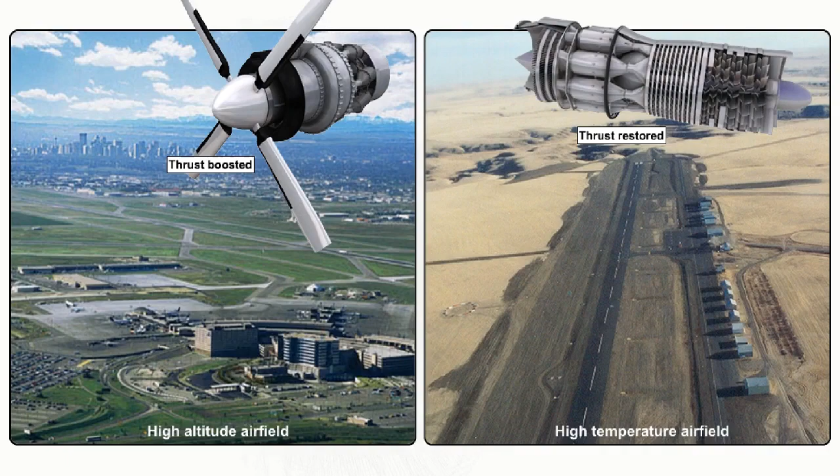In conditions of high altitude and/or high ambient temperature, the use of a water injection system can restore the thrust of a turbojet engine and boost the output of a turbopropeller engine. Typically, the water injection system is activated by moving the throttle to the takeoff position.

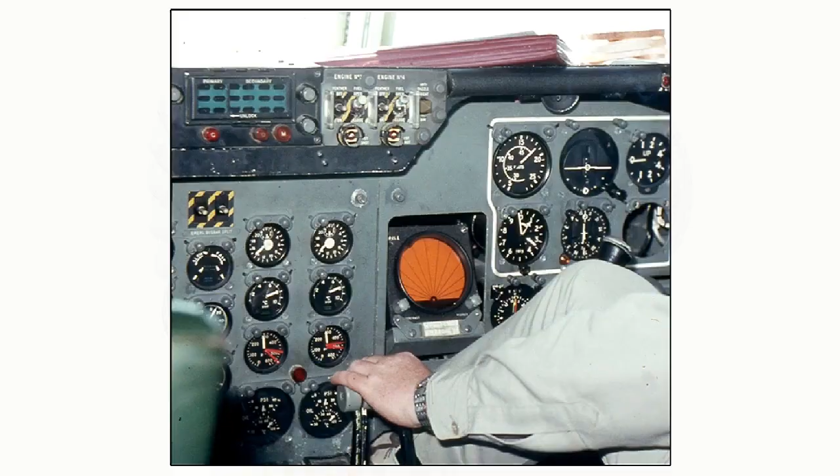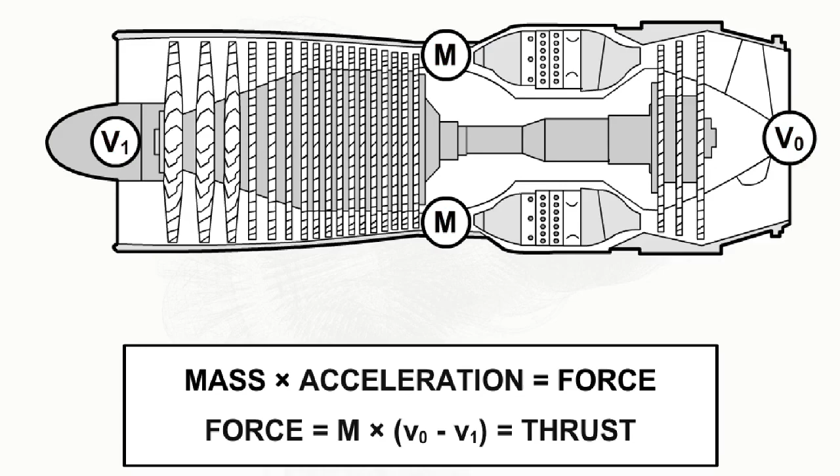We stated in the introductory lesson that the power output of a gas turbine engine depends upon the mass of air flowing through it and the acceleration imparted upon that mass of air. In conditions of high altitude and/or high ambient temperature, the density of the airflow through the engine, and therefore the mass of that airflow, decreases, causing a reduction of thrust in the case of a turbojet engine, or a reduction of shaft horsepower in the case of the turbopropeller engine.

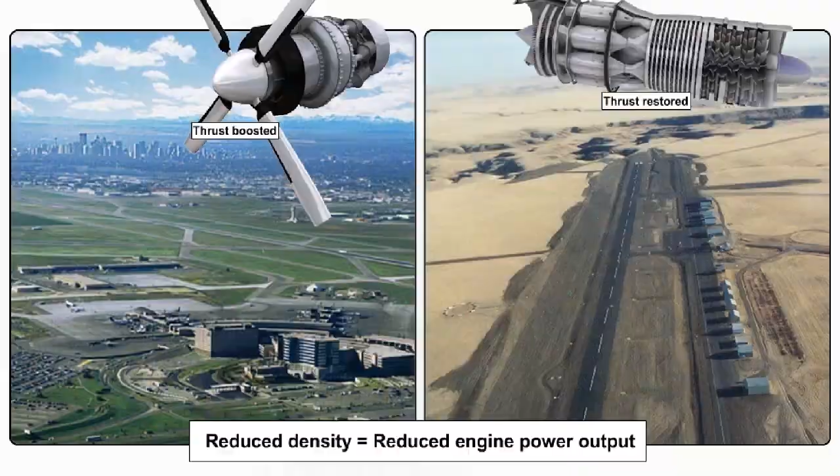To restore, or as is sometimes the case, boost the power output of an engine, the airflow passing through that engine can be cooled by spraying water into it.

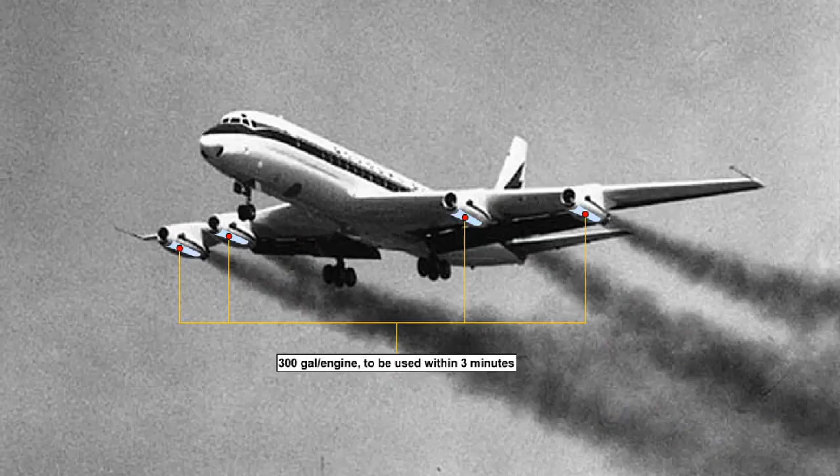The amount of water carried for use in these water injection systems can be large. The Boeing 707 and the DC-8 used to carry approximately 300 gallons of water injection fluid per engine, which had all to be used up during the 3-minute takeoff and climb. This equated to a water flow rate of 100 gallons per minute.

The fuel flow through each engine at takeoff was 9,000 pounds per hour, or approximately 22 gallons per minute. This gave a water flow to fuel flow ratio of 4.5 to 1 through the engine during those periods when the water injection was being used.

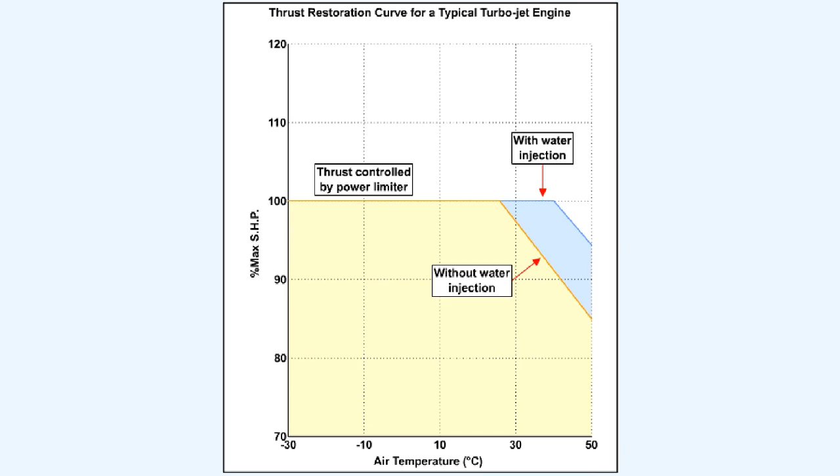The reason for limiting the thrust restoration of the turbojet engine to that of its flat-rated performance is that, although the mass of the airflow could be increased, with relatively few complications, by increasing the compressor speed, the maximum compressor outlet pressure has to be limited to prevent the engine compressor casing splitting under the excessive pressures that would be generated by using such a procedure.

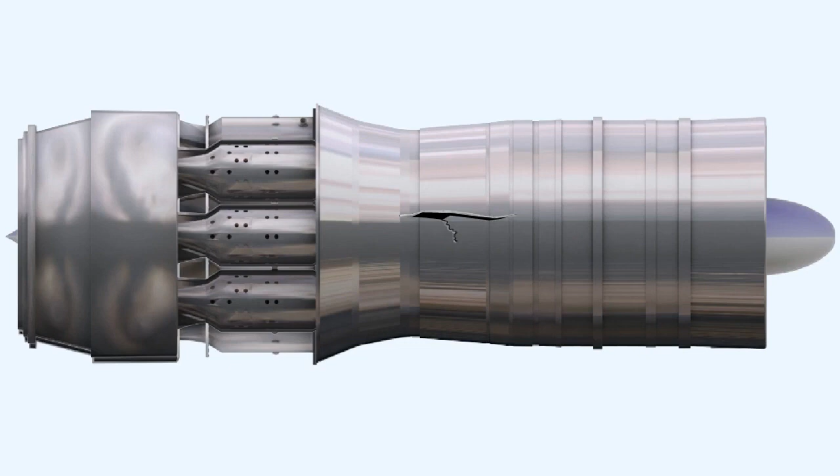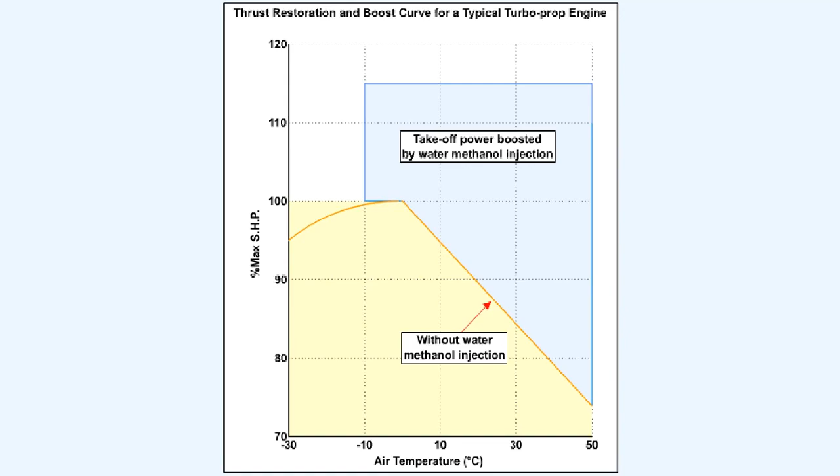In the case of a turbopropeller engine, if the water is injected into the combustion chamber, which is by far the most popular method of water injection, the mass flow through the turbine is increased relative to that flowing through the compressor.

In the turbopropeller engine, this increase in the mass flow through the turbine is not used to increase the compressor RPM, and thereby increase compressor output pressure. Instead, the increase in mass flow through the turbine is absorbed by coarsening the pitch of the propeller to increase the mass of air being thrust rearwards, while maintaining the engine rotational speed at no more than the normal maximum. This procedure very effectively increases the shaft horsepower output of the engine.

Some centrifugal compressor engines, and also some small American-designed axial flow compressor engines, used a system of injecting the water into the engine intake. Unfortunately, the water distribution was not of the best, and also the quantity of water injected had to be limited, so as not to cause an engine flameout.

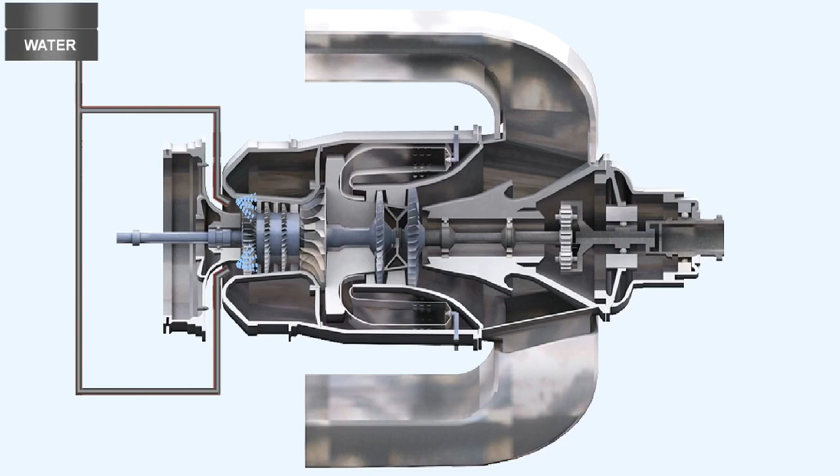As we stated earlier, injection of water into the combustion chamber increases the mass flow through the turbine relative to that through the compressor. Because a comparatively lower level of energy is being extracted from the turbine, even though there is an increased mass flow through it, there is a related decrease in the amount of pressure and temperature dropped across the turbine.

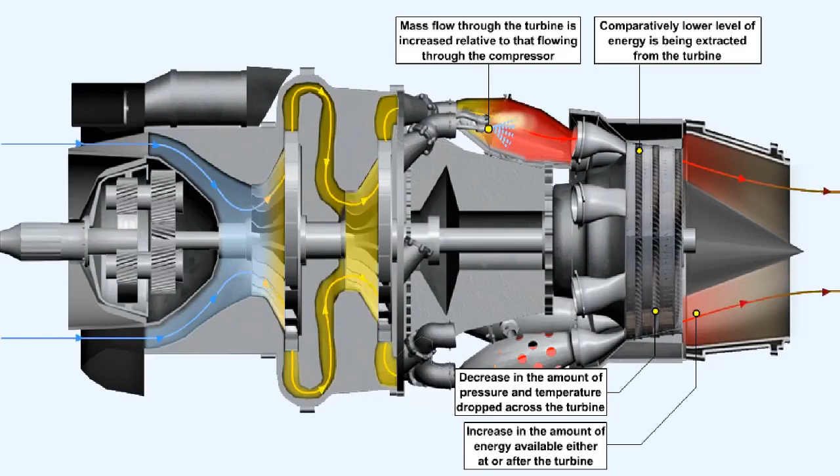This means that there is an increase in the amount of energy available either at or after the turbine. This can be used to generate extra thrust, either by driving the propeller at a coarser pitch, in the case of a turbopropeller engine, or, in the case of a turbojet engine, by increasing the pressure at the propelling nozzle.

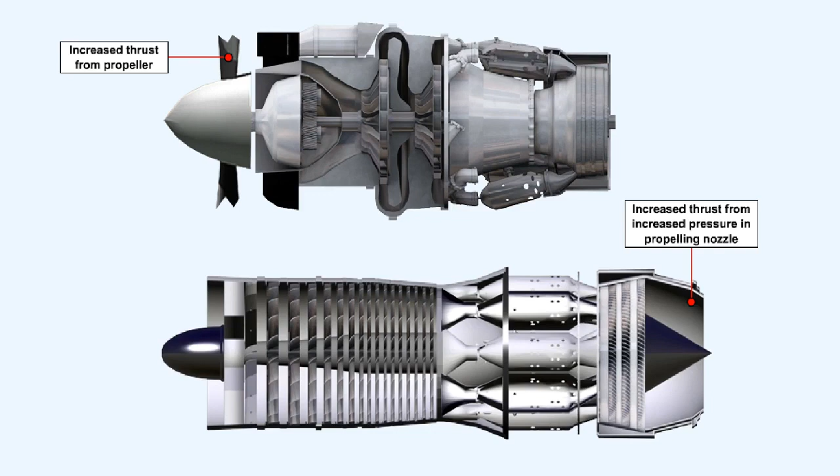A pure water injection system does have some drawbacks, not least because the water must all be used up on takeoff if it is not to freeze in the tanks as the aircraft climbs to altitude. It's logical to require an injection fluid that does not freeze. Thus, methanol is added to the water. The methanol serves primarily as an antifreeze.

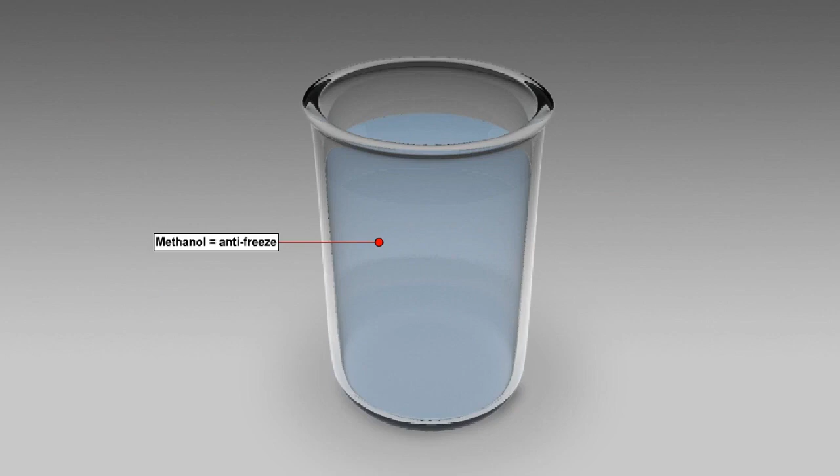By injecting coolant into the combustion chamber, the turbine gas temperature is lowered dramatically. However, if nothing was done to counter this fact, it would lower the amount of power potentially available, because the turbojet is a heat engine, which relies on there being a large temperature drop across its turbine. The bonus obtained by using methanol is that, because it is an alcohol fuel, it burns, and thus adds to the temperature of the gases, raising the turbine gas temperature back to its original level.

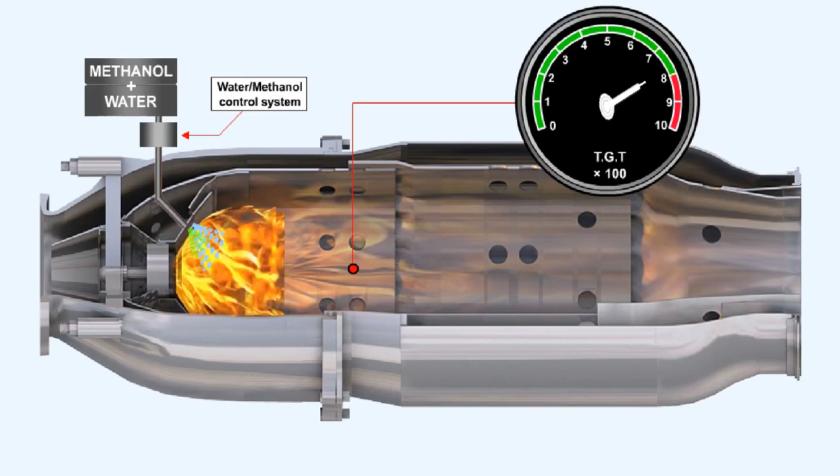In order to regulate the amount of heat added, the quantity of water methanol injected into the engine must be carefully regulated. This is accomplished by a water methanol control system. The proportion of methanol added to the water must also be carefully controlled. A ratio of 40% methanol to 60% water by volume ensures that the turbine gas temperature limits should never be exceeded during use of the water methanol system.

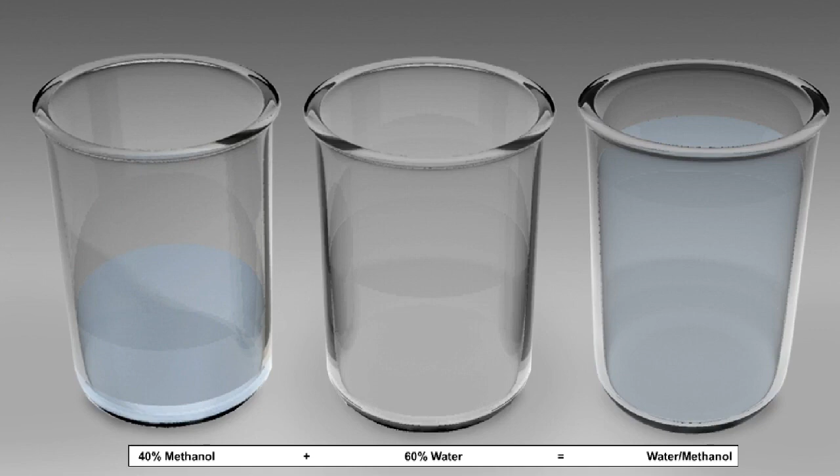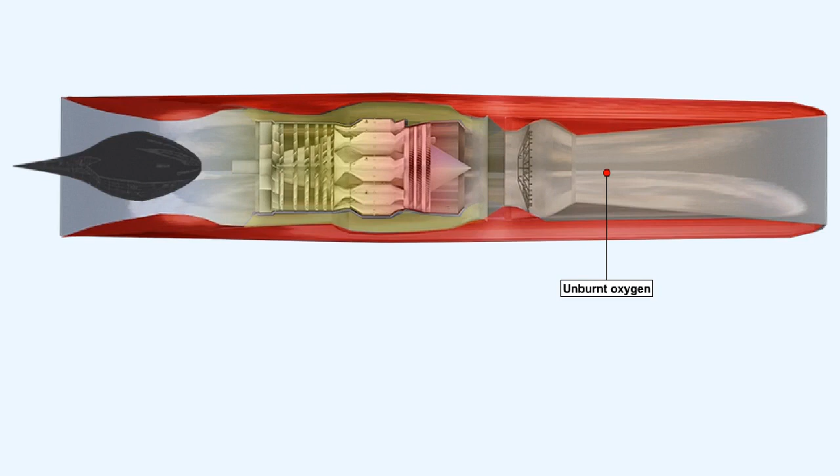Thrust augmentation by afterburning, or as it's sometimes called reheat, makes use of the unburnt oxygen which remains in the engine exhaust gases to release more heat energy. This is achieved by injecting fuel somewhere between the turbine and the propelling nozzle and burning it. Afterburning is used to improve takeoff, climb and combat performance. Its use is mainly restricted to military aircraft.

Fuel is introduced into the jet pipe through discharge nozzles centrally disposed around the axis of flow. This enables some of the relatively cooler turbine discharge gas to flow along the jet pipe walls, which aids in cooling the jet pipe. This is required because the afterburner flame temperature may be in excess of 1700 degrees Celsius.

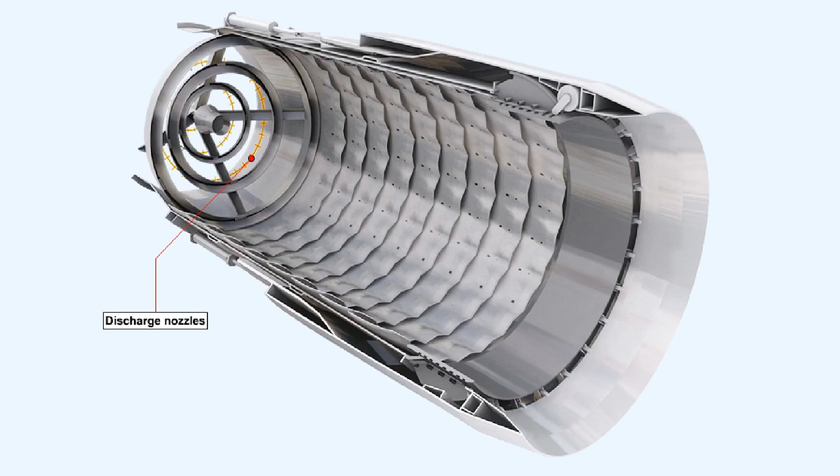An afterburning jet pipe is fitted with a variable area propelling nozzle. The area of the propelling nozzle is restricted during non-afterburning operation, and it's opened fully to allow for the increased volume of gas which is produced during afterburning operation.

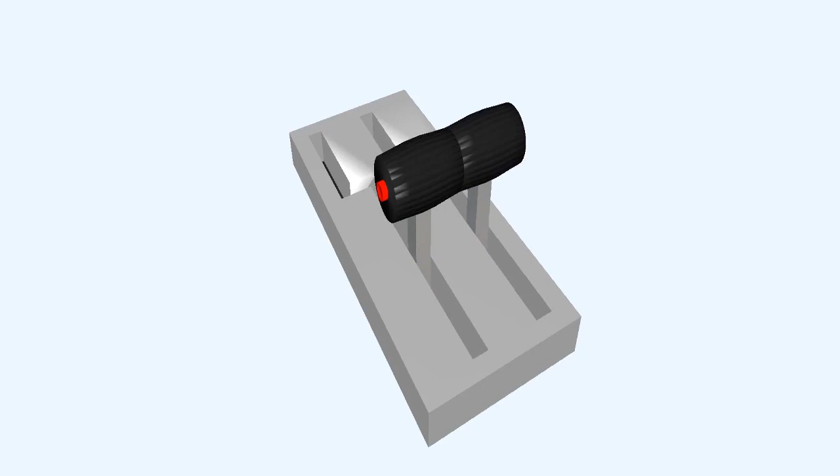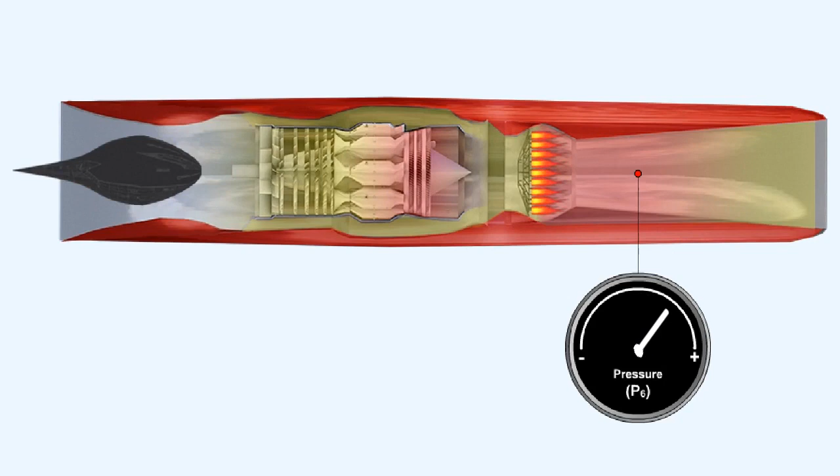The selection of afterburner is usually initiated by the pilot moving the throttle lever through a detent or gate. Control of the nozzle is automatic. When the fuel from the afterburner is ignited, the pressure in the jet pipe, which is called P6 pressure, will increase.

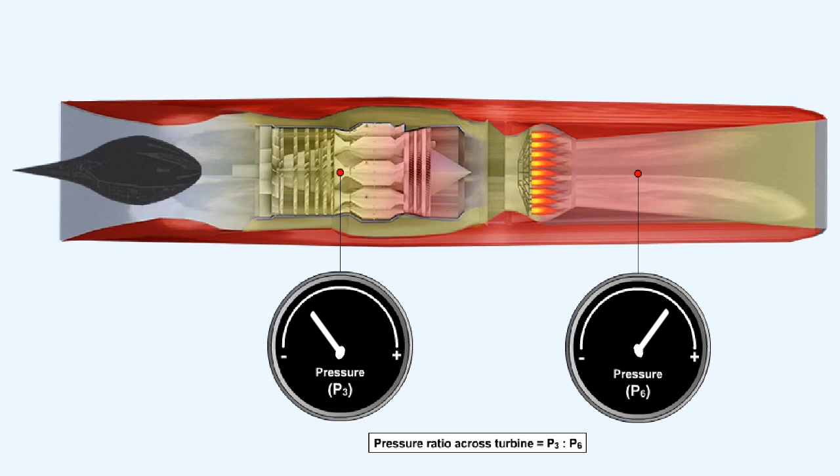This causes a change in the pressure ratio across the turbine. The pressure before the turbine is commonly called P3 pressure, so the pressure ratio across the turbine is P3 to P6. The variable area propelling nozzle is automatically opened so as to restore the correct P3-P6 ratio.

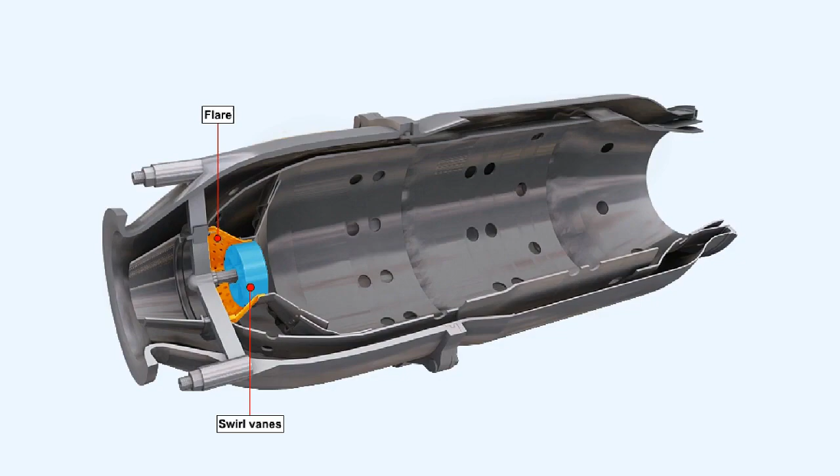In the combustion chambers lesson, we stated that because the flame rate of kerosene is only approximately 30 feet per second, to prevent the flame in the chamber being extinguished immediately, we had to slow down the speed of the air entering the combustion chamber. In the combustion chamber we used components called the flare and swirl vanes to effect that reduction in velocity.

Because of this low flame rate, we must also reduce the velocity of the gas stream through the afterburner, in order that the afterburner flame can remain stable. This is achieved by a diffuser, which is positioned before the afterburner section.

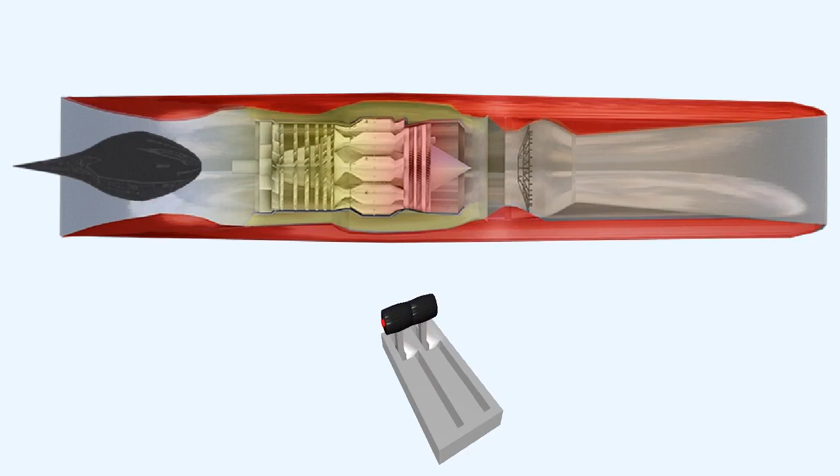When the afterburner is selected, an atomized fuel spray is introduced into the jet pipe through the burners. The atomized fuel spray is ignited by either an electric or catalytic igniter plug, or, in some systems, hot shot ignition.

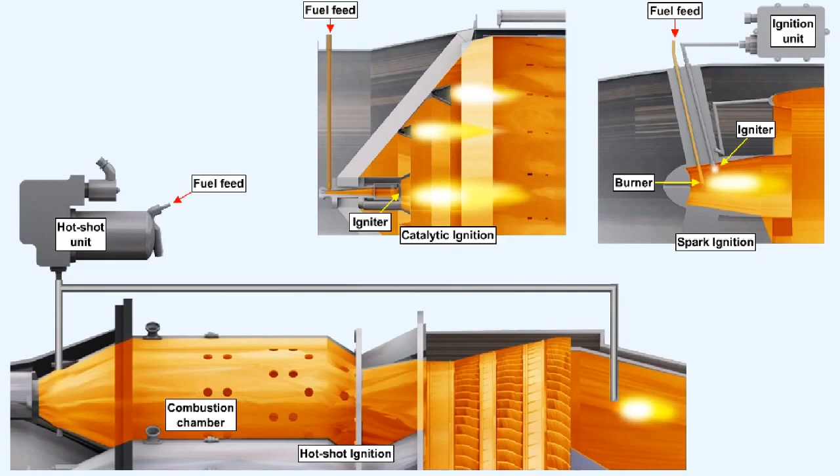Once combustion is established, the gas temperature increases appreciably. The increase in thrust obtained due to the use of an afterburner depends entirely upon the ratio of the absolute jet pipe temperatures before and after the extra fuel is burnt.

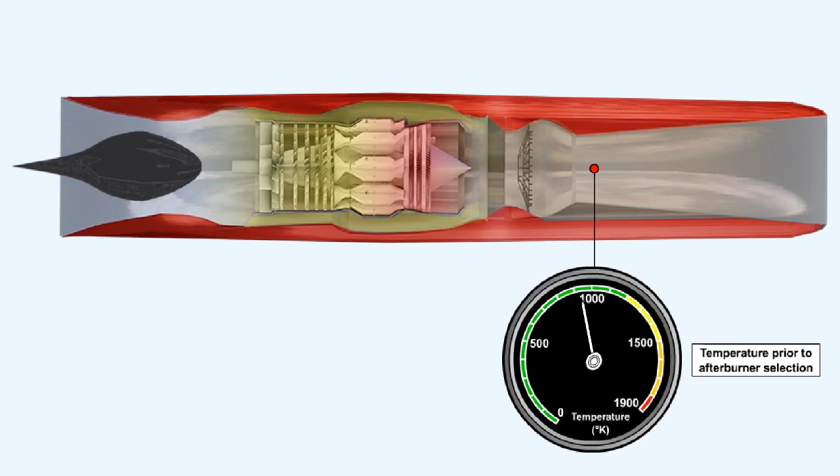If, for instance, we assume a gas stream temperature of 900 degrees Kelvin prior to selection of afterburner, and the temperature of the gas stream rises to 1500 degrees Kelvin subsequent to its selection, then the temperature ratio is obtained by dividing 1500 by 900. This gives us a temperature ratio of 1.666.

The velocity of the gas stream in the jet pipe increases as the square root of the temperature ratio. In our case, that is the square root of 1.666, or 1.29. This means that the gas stream velocity will have increased by 29%, and thus the increase in static thrust will also be 29%.

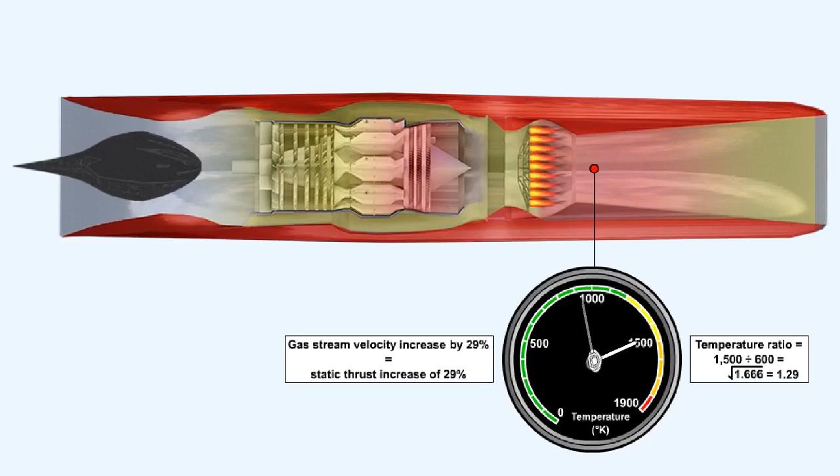As can be imagined, the fuel consumption goes up dramatically when the afterburner is selected, so its use is normally limited to short periods only. This concludes the lesson on thrust augmentation.